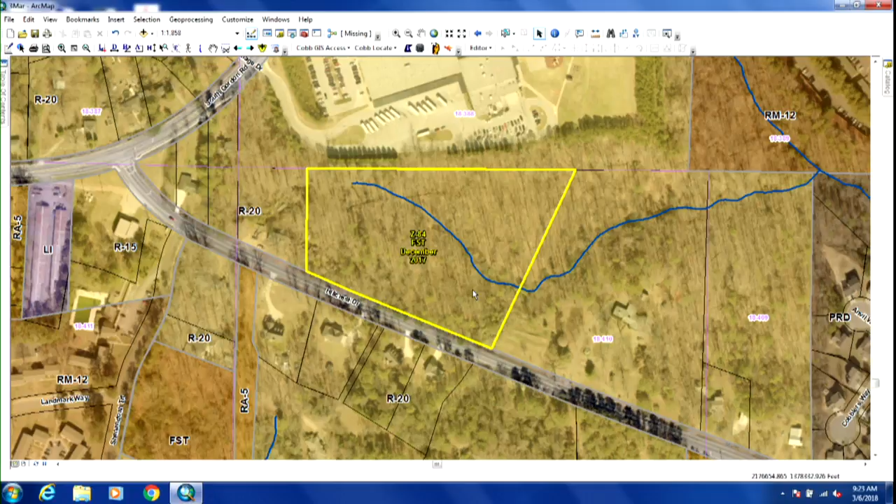Two variances are requested at this time: one to allow for a 5-unit building on the west side of the property, and the second to allow for a 4-foot reduction in the front yard setback adjacent to Hillcrest, where the deceleration lane moves slightly to the north of the property.

In my opinion, we've worked diligently to address the concerns expressed throughout this process, starting with the initial community meeting back in December, and then follow-up with both Commissioners Porter and Cupid. We've modified the original design from a 3-story structure fronting on Hillcrest to 2-story units with 4-sided architecture. We've moved away from private roads to public roads, with all associated right-of-ways, required setbacks, and cul-de-sacs at both ends of the public road. We've added amenities, fencing, and landscaping per the suggestions of both the community and the commissioners.

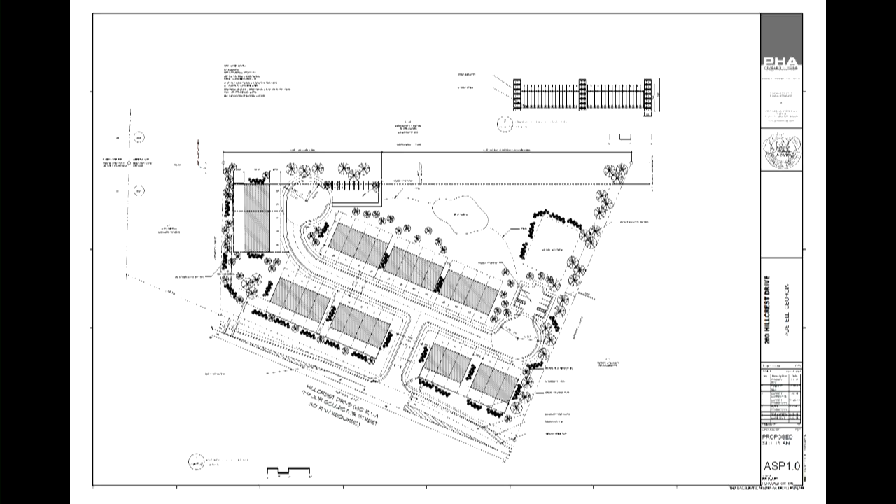If you go to the next slide, please. This is the detail we received, again, from the county very generously. There's a north arrow — that dark spot in the middle of this slide — and just above it is the sanitary manhole I was referencing. It's hard to read, but in a print it does indicate that invert is at approximately 1038. So we really do feel we've tried to address the sanitary issue, and as discussed last month, that's our problem following the hopeful rezoning of the property. But we do think this is addressable.

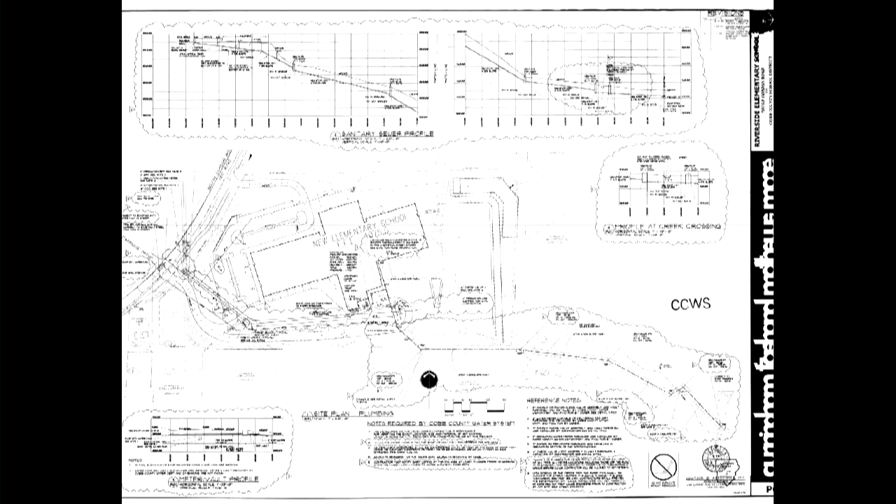We've worked diligently — if you go to the next slide, please — to address the concerns of adjacent neighbors regarding the impact of this project on their property. We have, in my opinion, fairly heavy landscape buffers. We've agreed to a 40-foot naturally maintained landscape buffer across the northeast or northern boundary of our property up to that guest parking area.

And then we drop down to a 20-foot landscape buffer. We have 20-foot landscape buffers on the east and west, and that doesn't include the additional 20-foot yards outlined for the property. So the buildings are 40 to 50 feet away from most of the yards, and the front yard is maintained at a 50-foot front yard setback.

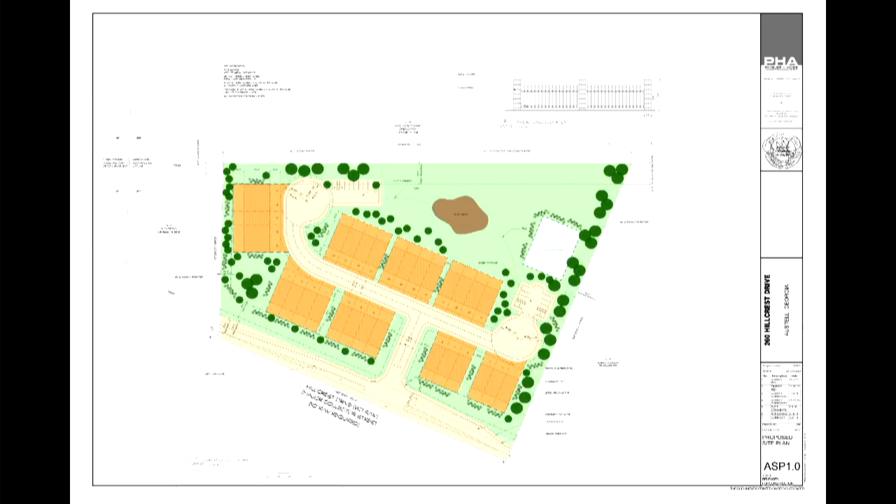Again, if you go to the next slide, please. These are the floor plans. One more slide — we have 4-sided architecture represented here, 2-story buildings, variation in window fenestration, door treatment, and garage door treatment.

The last slide is something Commissioner Porter asked us to provide, a typical view of the 2-story building from the street, showing the fencing that was on the initial site plan in your packet, and landscaping, shrubbery on both sides of the proposed fencing. We really think that along with the right-of-way improvements, sidewalk adjustments, turn lanes, and decel lane, this project fits very nicely with the future land use plan for this area, and we would appreciate your support for this rezoning.

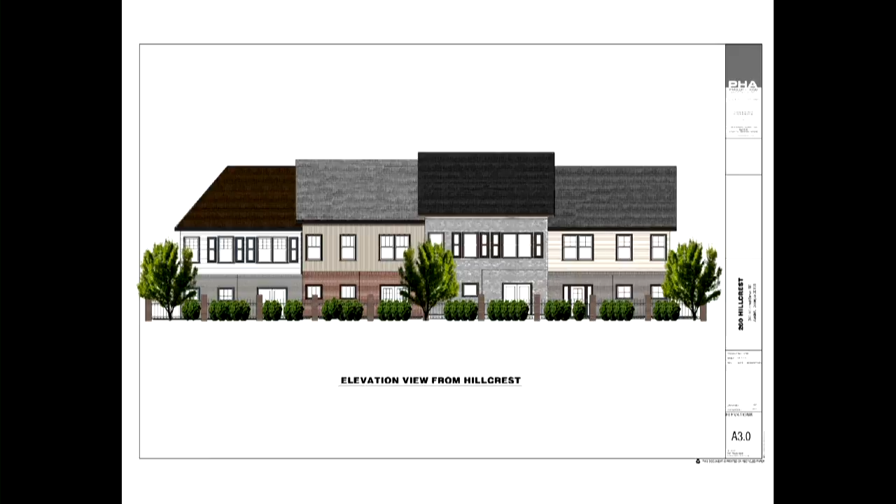I think we did, but we can do it again. Just for the record, anyone in opposition to Z84? Okay, not seeing and hearing it, it is back to this board.

Galt, if you'll handle our discussion. Okay, and I appreciate you looking into the sewer issue.

We had an email that all of us received from Bill and Lori Dennington yesterday, and their biggest issue was the sewer. I did talk to them by phone yesterday. They said they weren't going to be able to make it here today, but they're still in opposition. They were here last month. I explained to them that as a policy, we don't ask people to engineer the sewer system before they have zoning because of all the costs involved. But I do feel like they've made a good effort to go through that.

I think we've worked through all the details. Does anybody have any questions? So you can have a seat then, won't make you stand there.

Just a couple more comments. One, I do want to thank the applicant for working hard to adjust the plan and change it. The initial plan I saw, I just didn't like at all, and the 3-story architecture just wasn't going to fit the area. So I think they really did listen to the community as much as they could. I know there's some people who would prefer single-family houses here still, but this site's not really well laid out for that, and this does fit well within the land use plan.

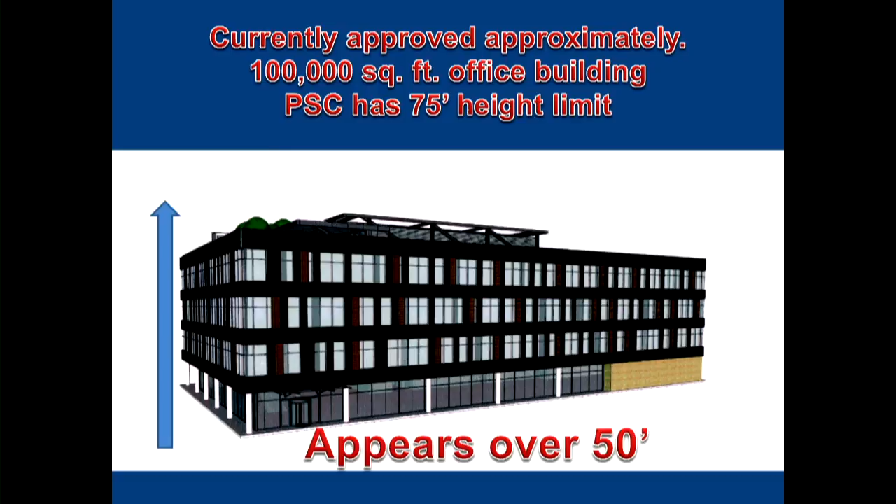Currently on the site right now, as it sits, could be developed tomorrow. It's been approved for approximately a 100,000 square foot office building. PSC has a 75-foot height limitation, and before you is the approved elevation as it's zoned today, which appears to be clearly at least 50, if not over 50 feet.

I want to direct everyone's attention to what this really is. This is not an individual small zoning. This is all part of a 51-acre mixed-use development that included high-density residential. Some of you may not have heard that or be aware of it, but in 1982, that's how it came in and was approved in 1983. It included 21.52 acres of residential along with a mix of office and other.

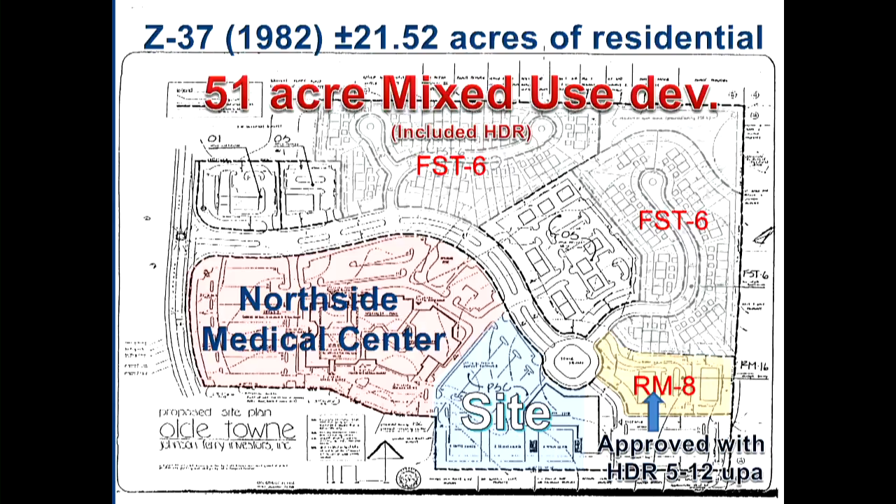As you see there, designated to the right, almost immediately adjacent to our site, it was approved and zoned as RM8 in 1982, which is high-density residential, and we all know in Cobb County, high-density residential allows 5 to 12 units per acre. So when this mixed-use development came in and was designed and approved, it was designed to include high-density residential.

Immediately to the left, I think, is something important to look at when you're reviewing this application. Already approved is another 80,000 square foot office building, again with a 75-foot height restriction. You can see the difference in the pads there. To the left is the existing Northside building. To the right is the smaller pad directly adjacent to us, PSC being there to the right. It's already approved, height limitation of 75 feet.

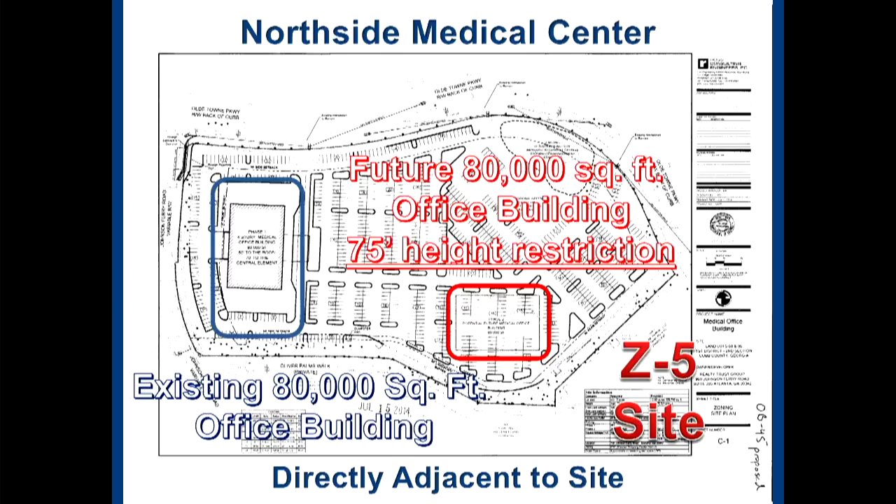If you look at the building there, that is the current Northside building. The second approved building adjacent to our site is designed to be the same size and at least that height. I think if you look at those building pads, you can tell that the building immediately adjacent to Z5 is going to have to be higher because it's the same square footage but a smaller building pad.

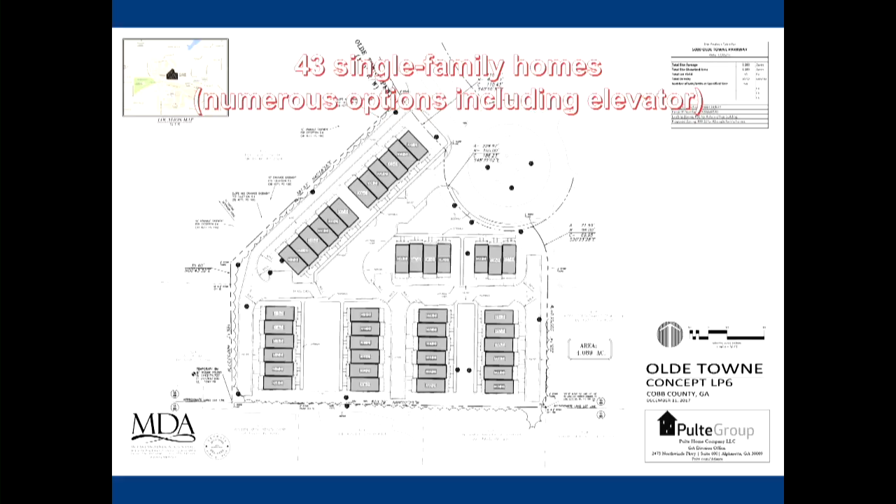So we're proposing to replace that 80,000 square foot office tower with 43 single-family homes. They're going to have numerous options, including elevators, so they'll be available for seniors if they wish to purchase them and include that option in the home that's selected. You can see the elevations before you.

We think they're going to have a base that starts about $550,000 and an average sales price of $700,000. There'll be different styles allowed. This is one of them. You can see high-quality products, 2-car garages. Every home will be for sale and have a minimum of 3,000 square feet.

Interiors, you see, this is all in the letter that we've submitted. Upscale, superior interior options that'll be available to all of the prospective homeowners there.

We have a landscape plan that's been submitted. What you see there is an updated landscape plan that I got last night. That will be updated and filed with this application before the Board of Commissioners hearing, and will be subject to review and approval at plan review.

We have been in contact with the immediately adjacent neighbor, Olde Towne Athletic Club, who submitted a letter in support. And just so everyone knows, the RM8 that was approved was not developed because Olde Towne ultimately utilized that for tennis courts. So the high-density residential that was planned for and designed for this area has not yet been built.

Let's talk about reduced traffic. There's some traffic concerns with Z5, these are Cobb County DOT numbers, not my traffic engineer's. Our plan, if approved, would generate 250 trips a day. The current zoning, if built, would generate 1,072 trips per day, a massive increase in the traffic down Olde Towne Parkway. And you'll have to remember that there's already another large building approved that's going to generate roughly that same amount of trips per day. So we think with Z5, it helps the traffic situation drastically out there.

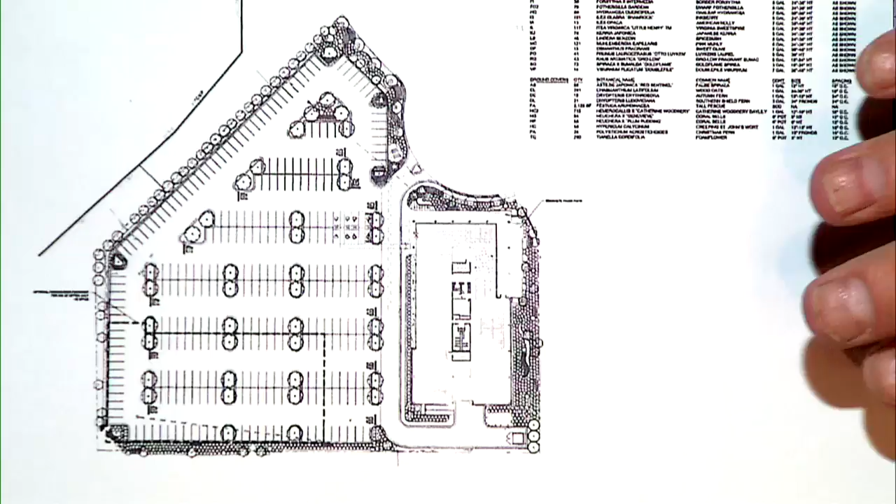One of the things, and I'm going to ask for some help putting this up, is a landscape plan. The one being proposed today, we haven't seen, obviously. But what is being shown to you right now is a landscape plan that was approved with the office park. The upper right-hand corner is full of plantings with specifics, their caliper, and as you can see along Olde Towne Parkway, which is also in the upper right-hand side, there is heavy, heavy landscaping. And what I'm showing you now is what is being proposed by the applicant.

Having gone out to the site, those orange trees are existing mature trees today. So we're not seeing a lot of landscaping, not a lot of hiding of what will be the backs of the townhomes from Olde Towne Parkway. So what will easily be visible—this is the back—you'll see the cars parked in the driveways, whatever else you park in the driveway, perhaps garbage cans if they're not kept in the garage.

We feel that this landscape plan is imperative and it needs some detail—what is being planted, and size, caliper, et cetera.

Going down, I'll see if I can quickly, in the time allowed, go through the stipulation alterations we are requesting: that the use of garages as living space be part of the covenants.

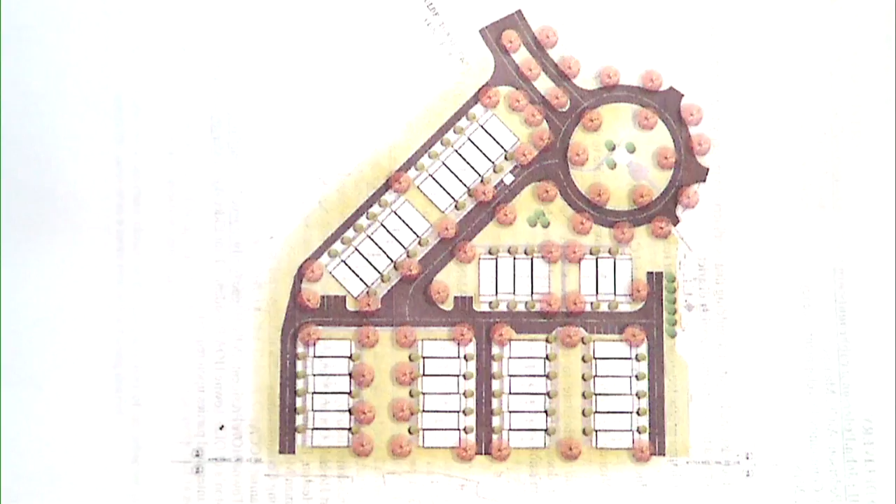Stipulation 9, we'd like to see everything irrigated. Stipulation 11, with regards to stacking, it needs to be on Olde Towne Parkway and Johnson Ferry Road. The second sentence needs to address construction and delivery hours, and also there's no stipulation requiring construction worker vehicles to be parked on the site—no parking of any construction trucks or vehicles, either worker or delivery, to be parked or stacked on surrounding subdivision streets.

Then stipulation 13 seems to be taken from the old stipulation document with regard to one building. We're proposing a change as to when certificates of occupancy can be given. Stipulation 15, what we have listed were the approved...

...construction hours with the original zoning: Monday to Friday, 8 to 8, Saturday 10 to 4, no work on Sundays, holidays, Halloween, or the first day of Cobb County schools without district commissioner prior approval. We do have children, and they are going to be out and around on those days, especially the first day of school with the buses. An additional stipulation that was also agreed to in the past was the delivery of large equipment or vehicles—not before 8, not after 8 on Monday through Friday, and not on the weekends.

Stipulation 18, with regard to what is a minor modification—for the concern of the neighbors, it's what they will see from Olde Towne Parkway. So if you relocate a structure closer to the property line of an adjacent property or Olde Towne Parkway, we recommend that this not be a minor modification, and it would have to come back as an other business item. Also changed to read: increase the height of a building along Olde Towne Parkway, also not a minor modification, and change the access location along Olde Towne Parkway, also not a minor modification.

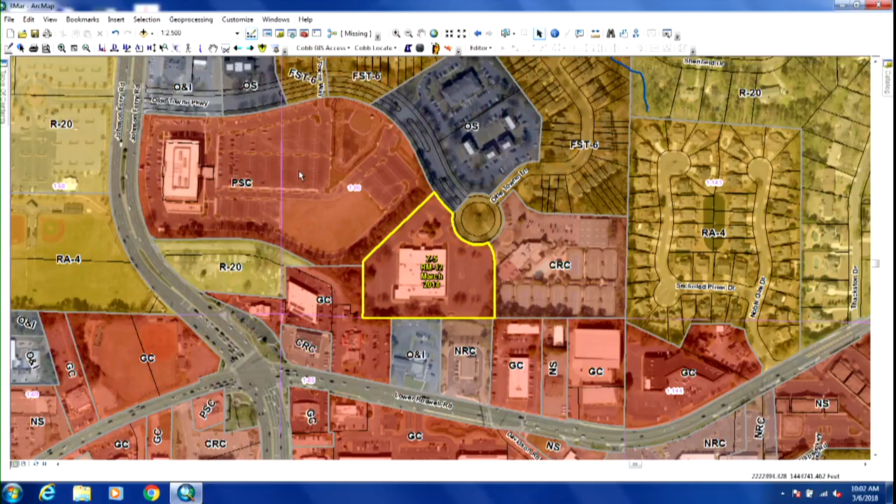What I'm saying is, sure, there are variances on this project. Let's talk about impervious surface. This was designed and is retained with the master retention in this mixed-use development at 84% impervious. It's already engineered for that. We're going to have a reduction in that impervious surface. So that's a variance, but I would say it's a positive variance. We're not going to be at the level of impervious surface that a RM12 would be if it was next to a R20, but we're going to be less than what is there now and less than what it's engineered for. So that's a positive variance in my mind.

On the land use plan, I understand that guide says RAC versus CAC. I understand that. This has been a CAC since Jimmy Carter was in the White House, or at least Ronald Reagan. And we need to maybe take a look at some of those things. But remember, this is a mixed-use development designed to have high-density residential in it. And so I would submit that we're in line with the plan that was approved, and it's been developed with that in mind.

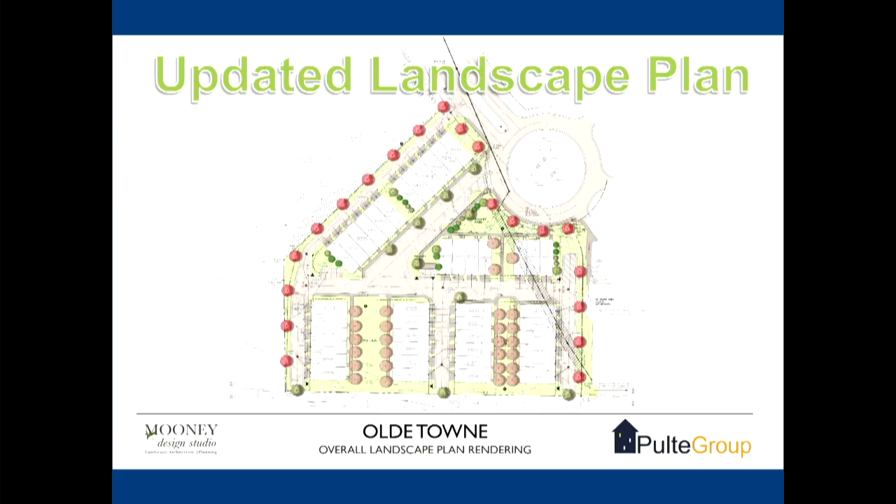I guess our issue seems to be with the definition of variance. In the old days, a variance required a hardship for some specific reason. So just because the things that you all choose to put in your letters don't really address, I think, the things that are more important as to the code—because the public has expectations that, okay, if this is the zoning, this is what I should expect to be developed—but that's not been the case.

Yeah, and I think you'd find a lot of developers who said, I'm going to come in with a zoning that's RM12 to the code, and that's it. I think you'd find a lot of them saying, great, let's do it. But we don't ever do that. We put more requirements on them than are in the code. And then when they come in and say we need this variance, which there's no evidence of a negative effect on home value or anything, we don't talk about all of these other restrictions that aren't in any of our codes that we make them do.

The law defines those as variances. The Supreme Court, the legislature says you can do that provided those conditions are put on to address a negative effect of a zoning. So it happens on both sides.

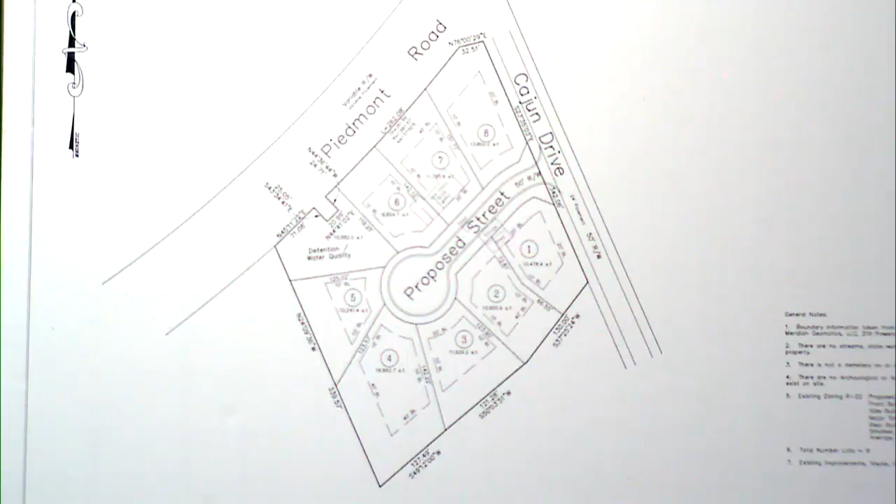Good morning, Commissioners. My name is Tulin Avard, and I'm the case manager with the Bells Ferry Civic Association, and we are here in opposition of Z13. We believe this proposed development is too intense. Even under an RA4, the maximum number of houses allowed would be 5. This location is not ideal for a higher density development since it is not compatible with adjacent single-family detached dwellings, which are zoned R20 and R15. Furthermore, approval of this request will encourage other zoning requests which would also not be consistent with existing properties in the area. This area is better suited as low-density residential.

Another concern is the existing traffic. Cajun Drive is used as a cut-through to Piedmont Road, and at times throughout the day traffic becomes backed up trying to make a left-hand turn onto Piedmont from Cajun Drive, and this bottleneck will often block access to the new development. Lastly, we are worried that if this property is rezoned RA4, a new site plan could be submitted that may consist of attached residential dwelling units, including a combination of duplexes, triplexes, and quads.

On that note, the BFCA respectfully asks that you do not recommend approval of Z13. Thank you very much. Next speaker, please.

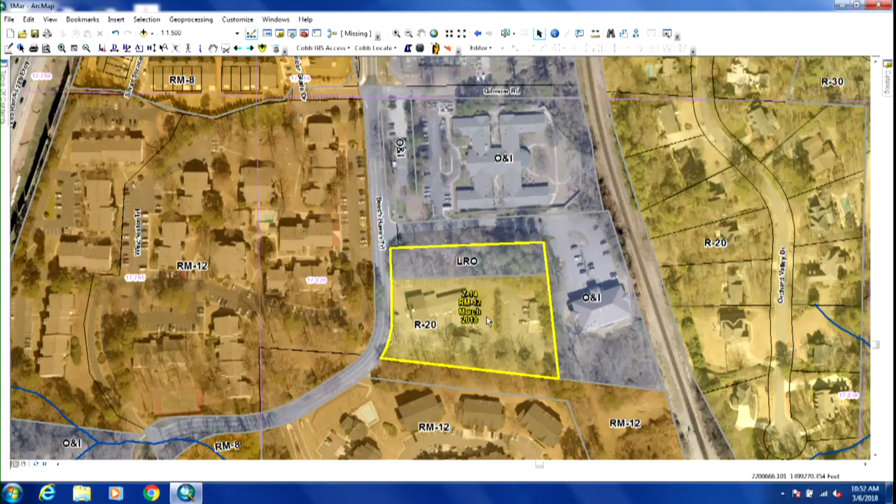And what we're proposing in this application is somewhat of a unique RM12 application and proposed rezoning. This is seeking RM12 rezoning for the purposes of detached homes. These total a maximum number of 29 homes under the RM12 classification.

I'm going to turn to the site plan and kind of go through this, but I think rather than just rolling through it, I do want to address one of the differences with this RM12 application, and that is with this application, we are seeking a detached home. You can build detached homes under RM12. You can also have attached homes under RM12, and you can have multifamily under RM12. In this case, the adjoining RM12 projects are multifamily apartment communities.

What we were proposing here and what Edward Andrews Homes looked at originally was an RM12 attached development, which would be townhomes, versus an RM12 detached. And under the RM12 attached arrangement, we would be able to do that, and it would not require variances for that type of design and site plan under the ordinance. However, when you detach homes under RM12, our Cobb County ordinance and zoning ordinance doesn't really fit.

For all three, RM8, RM10, and RM12, what I call the RM categories, detached homes are then kicked into having to meet requirements for RA5, essentially. And we don't have the concept now that we're seeing in the marketplace, not just here but elsewhere, that have been successfully built and developed and sold - really a concept of detaching townhomes.

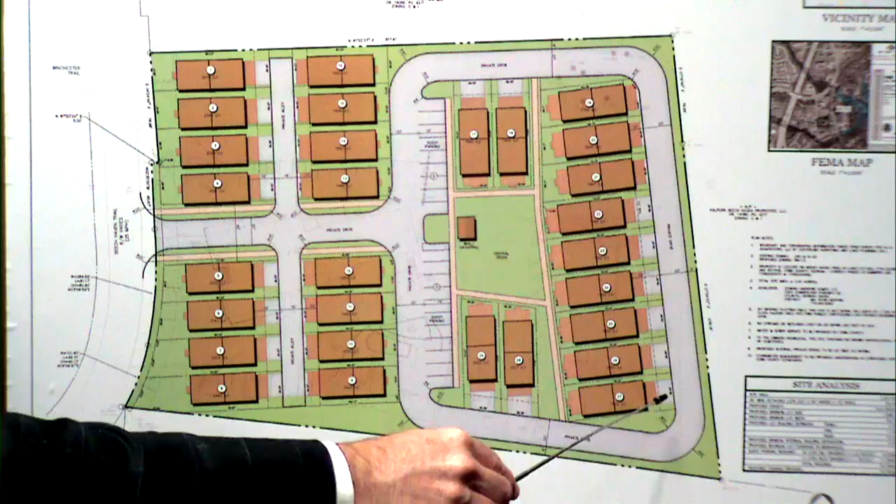And then as you enter the property, there's a central green park area in the middle, and again these homes then face out to that central green park area. So as you enter, all homes have rear-loaded garages, and these are all two-car garages for this particular project. In addition, let me show you, as we move through this, the elevations for these proposed homes.

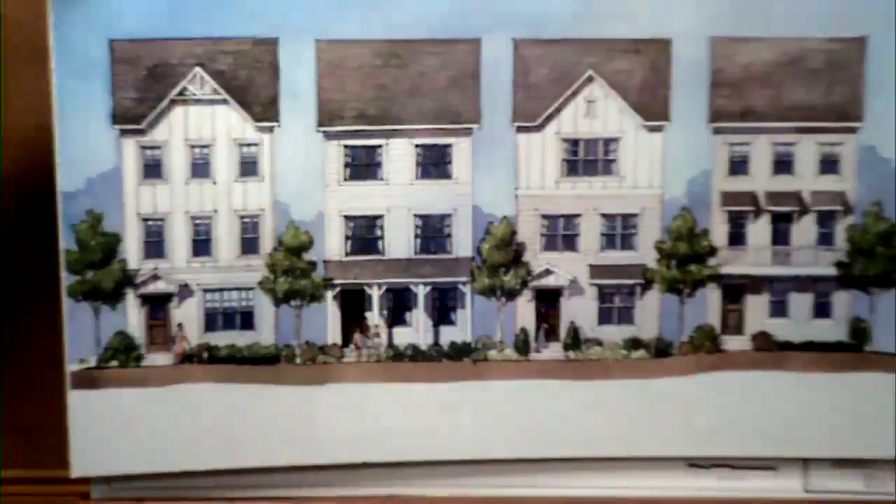Edward Andrews Homes has developed this as a southern cottage look that they have fallen in love with, and that others have as well - it's been highly successful in other communities. This southern cottage look provides for something just a little bit different. There seems to be some weariness in certain segments of the market, among home buyers, toward the stone and brick type of look.

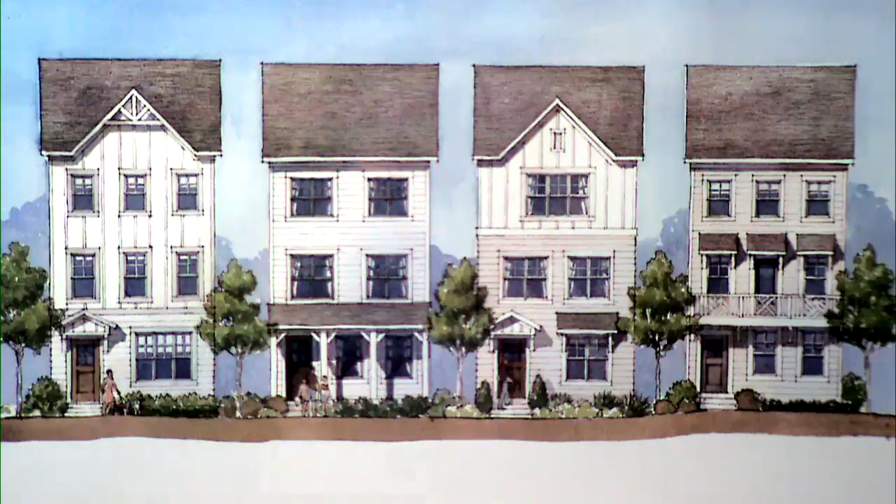And so what they have done is develop specifically these southern style cottages, as they call them, which are still done to that same high level of quality, but provide a clean look, a somewhat different look, and it separates them from the marketplace and from a price point perspective. Speaking of price point, just for informational purposes, these would be selling in the high 300s into 400 and mid 400s.

We do have a stipulation letter dated February 28th, in which we detail both these elevations as well as some of the standard stipulations and conditions you'd be accustomed to seeing relating to the homeowners association and so forth within this proposed development. But also, I think it's important to consider the situation where this property finds itself.

It finds itself in a regional activity center - actually, it's in a regional activity center with a sub-designation. For those that don't know, our regional activity centers - there are only two, one in this Galleria Cumberland area and one in the town center area. Within each of those regional activity centers, the future land use plan at times goes further to designate subcategories or sub-areas beyond just simply a regional activity center.

This property falls in one such subcategory area - it falls within a regional activity center and a subcategory area of high-density residential. So what is recommended for this property is not only intense, but high-density residential, meaning up to 12 units per acre.

So this same property at 2.4 acres, we could seek RM12, which is certainly an allowable category under the land use plan. It's encouraged to have residential, encouraged to have multifamily residential, encouraged to have for-sale townhomes, or as we are proposing here, simply for-sale detached homes.

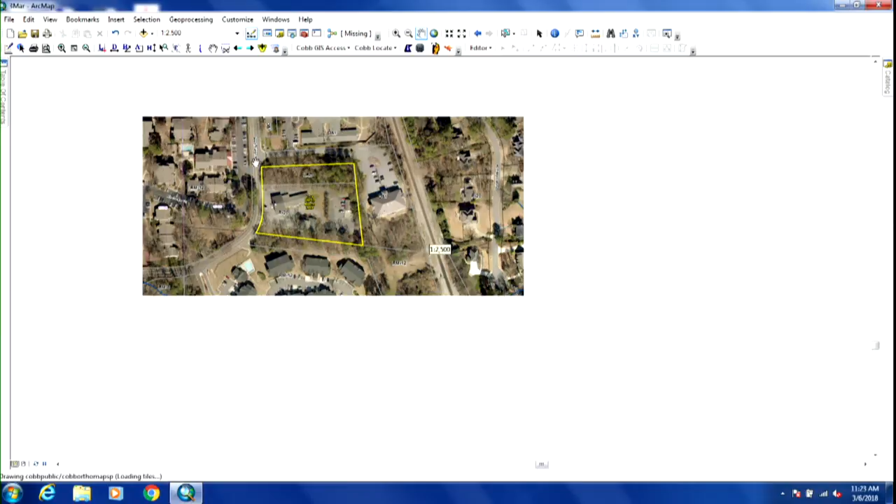But when I talk to people that live in the area, especially across the street, which is Winchester Apartments, old apartment complex, been there many years. If you go right up on Beech Haven Trail, just out of view there on the left, there's a brand new Pulte development that sold out before it was even put in. I talked to some folks who live there and they said if this was in when they bought, they'd buy here. They like the concept that much. So I think that's what we're going to see. And the people in Ivywood say that they love this. They think this is going to be an enhancement to the community, probably will help their property values quite a lot. So other than the setback on the street, I don't have a problem with the density. I love the appearance of this, and I think this will work well in this community.

People who said maybe would have a traffic issue because of this, the traffic study that was done says that is not the case. We have a major intersection to the north of this at the east-west connector. The level of service there won't change because of this. This is not a very heavily traveled road, Beech Haven's not a very heavily traveled road, and I don't think adding 29 units to it is going to impact it at all.

Staff is fully in favor of this and supports it, and recommends approval, and that's going to be my motion. So I'm going to recommend approval of Z14 for the site plan for RM 12 zoning, subject to staff comments and recommendations, subject to the stip letter submitted by Mr. Moore dated February 28th and the revised site plan, subject to the southern cottage designs submitted to us as well, and subject to a few changes to the stip letter.

Under stipulation number 3, at the end of that sentence I would add: all units must be for sale only, with a maximum of 10% of the units, that would be about 3, to be rented at any given time. Oversight and enforcement of same would be the responsibility of the HOA.

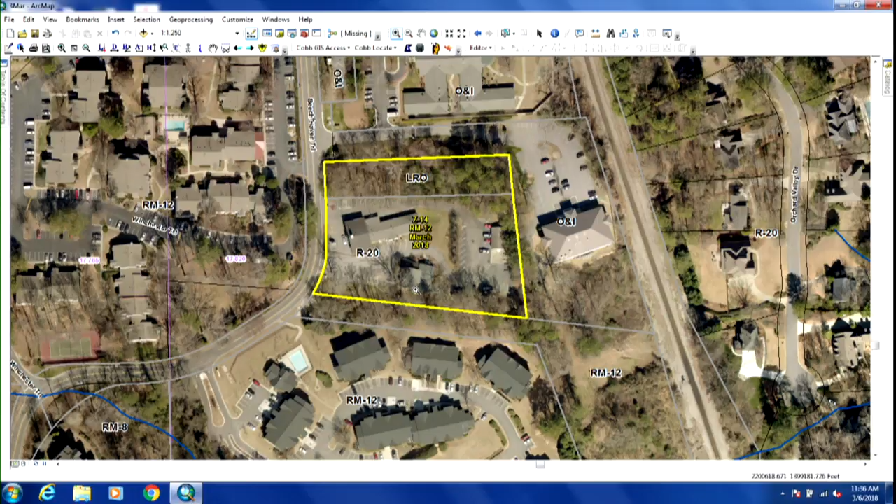So it's a new product. We haven't seen anything like it. We don't know what to do with it, so we're trying to come up with something to see if it works. This product might not work, but this is an ideal location to put it and see - it's in a regional activity center to see if something new would happen. So I know while it doesn't meet the code, I see why they're having to do it, and I would support it, even though I totally agree there are too many variances. But how else do you do this kind of a product?

Typically you don't, because you don't have an ordinance to fit it into. You don't create a new zoning category before you have a product. Somebody could bring this product to the board and say, create a new zoning category for it, or let's look at detached RM12s and see. But we haven't really gone through the whole process where everybody's weighed in and thought about it.

When you get down to this small a separation, you have to look at building codes - how are they going to be constructed? Do you have to firewall both walls going up where they're only separated by 6 feet? And does it create any special issues for the fire department getting access to those buildings? I think we haven't really gone through what you go through when you're considering ordinances, and when you make it up on the fly it's a little different.

Can the fire marshal come up here a minute? I have just a quick question. The fire marshal's representative would be glad to come up. I can call the fire marshal himself today. These being at 6 foot, is this going to require the firewalls on each side?

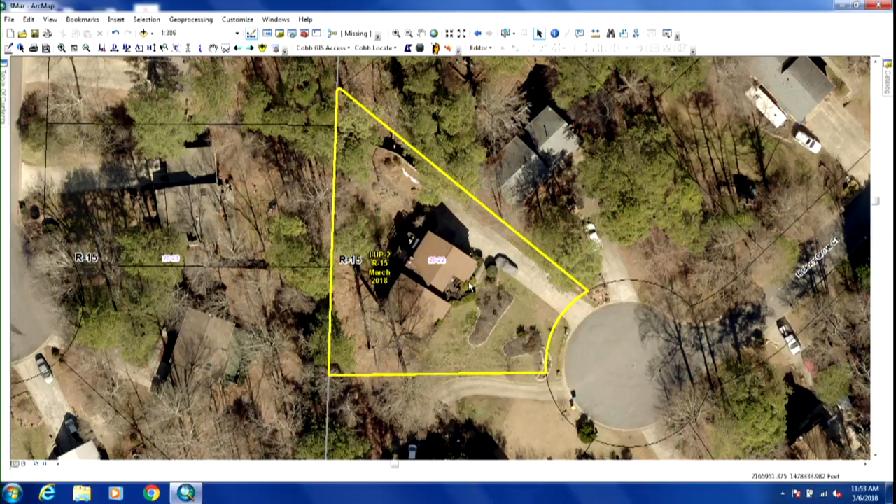I think in order for this to work, and we've been consistent with keeping these areas residential, I believe these are students at Kennesaw, if I'm correct. These are students at Kennesaw. And we've been pretty consistent, the board up here, of not allowing this to occur in neighborhoods because it does tend to run down the neighborhood. You have additional traffic, you have additional parties. So my motion would be to deny this based on this being a single-family residential area that needs to remain that way.

Can we get a second? I'll second that. Second, Skip. Any further discussion? Call for the vote. So that request is denied.

Again, you are allowed to have one tenant beside yourself. I'm sorry, one tenant beside yourself there. You can have that. Okay, thank you very much.